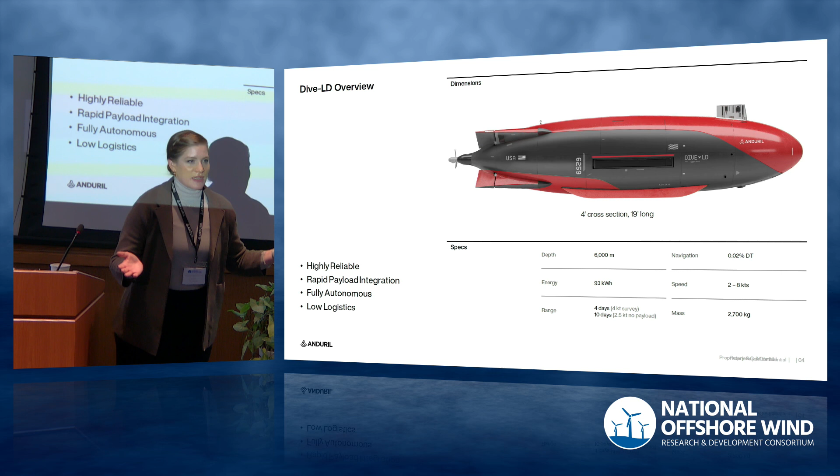The Dive LD is, for lack of a better word, a submarine robot. Rated to about 6,000 meters. She is fully autonomous and untethered. So it's a reliable operation. We can rapidly integrate different payloads.

So that means that we can take either commercially available off-the-shelf sensors, integrate it into not only the hardware itself, but our software control systems. And we can also do that with bespoke design and partnership with other clients, such as the Department of Defense and others. So it is quite malleable. There's a lot of different mission sets that she can address.

But for the purposes of today's conversation, we are going to be focusing on the commercial applications, i.e. subsea surveying, so cable inspections, foundation inspections, and just generally assessment for obstacles on the seafloor that could interfere with offshore wind construction. So that's the small market we are targeting right now, but I think it's designed to be a bit of a Swiss Army knife, and you can see why.

So we've stuffed a lot of sensors into this thing. We have a sub-bottom profiler, we have a side scan sonar, we have a magnetometer, we even have a camera. Well, it turns out it's really difficult to take high quality pictures in the Rhode Island Sound. It's rather murky, but we're excited to see how this can apply in deeper, clearer, less turbid waters.

So the cool thing about this is, as I said before, it's kind of a Swiss Army knife. And what we're working on is figuring out what combination of sensors is the most effective in terms of energy usage, right? So this is battery powered. We have 6 batteries on board. The more sensors you operate at a given time, the faster that battery is depleted, and the shorter your mission is actually going to be.

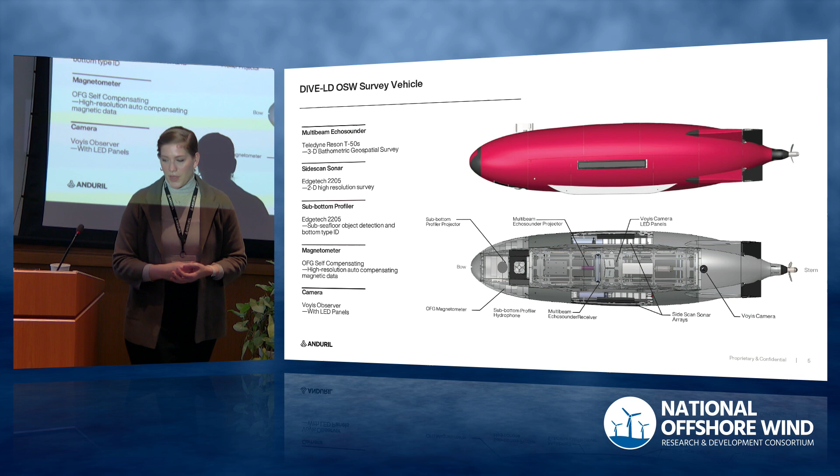So the more frequently it'll have to come back to shore, either swap out with another LD or charge and then go back out again. So it's that fine balance to figure out what the mission is, what sensors are most pragmatic in executing that mission, and what's the most time-effective course so that we minimize the number of times we have to bring her back for recharging purposes. So this is it in a nutshell. And here's more generally what they do, right? So we have a multi-beam echosounder. I didn't mention that before.

It is in fact on there. Eric's glaring at me—it's a very important piece of equipment.

But what this essentially does, and I won't get into each one individually, it's a different layer of understanding the—I'm sorry guys, I'll stay closer to the microphone.

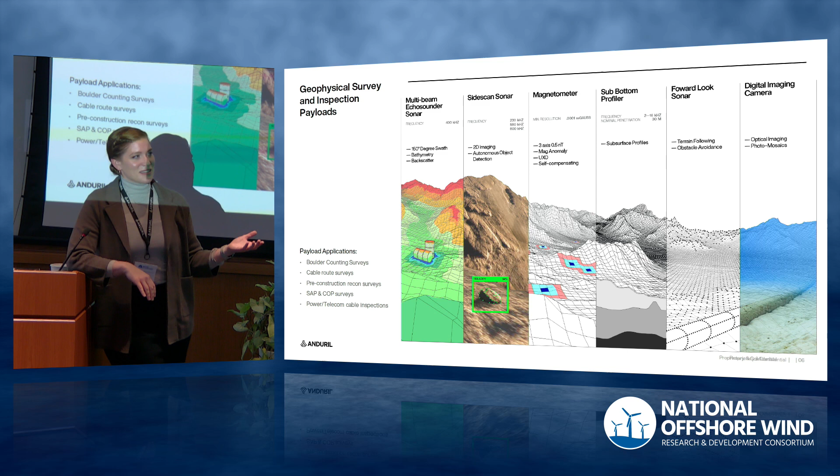It's the different layers of understanding the world below the ocean surface—not only the topography, but what's underneath the surface, what composite material is present. So how do we find big boulders that might get in the way of a subsea cable, or artifacts that need to be cleared for archaeological purposes? These are all very real problems. Our thought process was, let's incorporate the tools as we can. We are not designing any of these sensors, we are integrating what is readily available, and I think many other platforms actively use today. But how do we consolidate them and make it usable with our software?

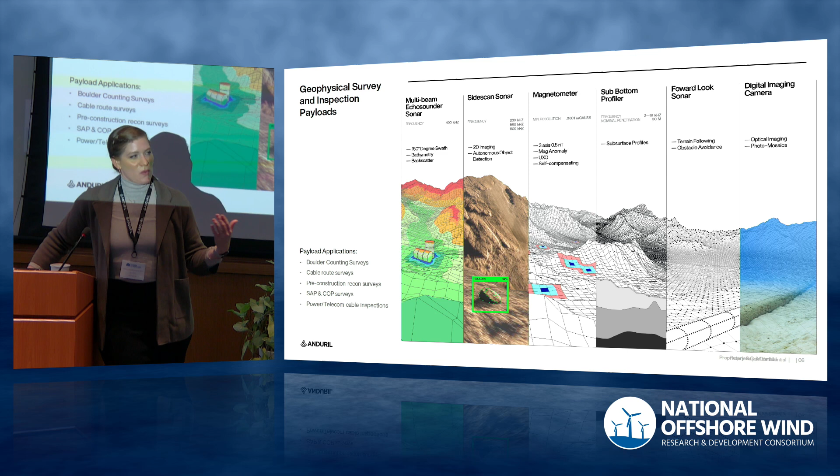So, moving on—there's lots of things on the Dive LD. I'm excited to show you guys in person tonight what it actually looks like. But what problem are we actually trying to address?

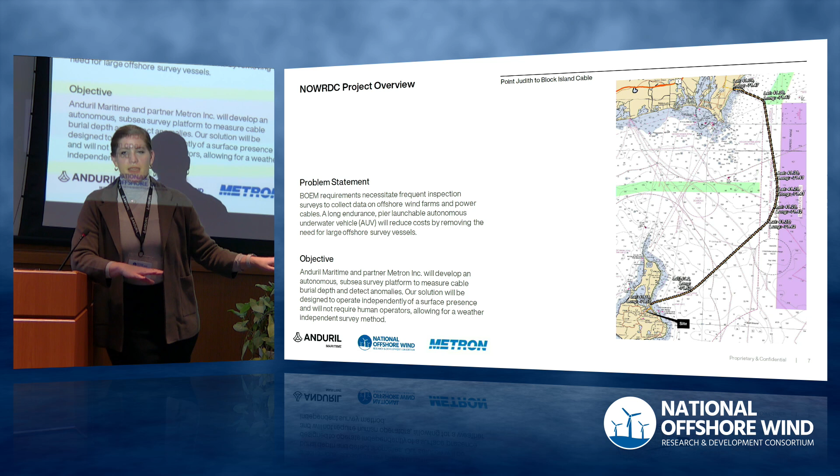I'm just curious, I wasn't here for the previous presentations—show of hands, who has actually been out to sea, like the ocean, and had to sleep overnight on a vessel? Okay, that is awesome, so a large number of people. So I don't need to reiterate to you how truly awful that can be, right?

So it is high risk, especially if you are conducting work that is sensitive to sea state and wind speeds. It is also high risk for the environment—not only the people doing this work, but the environment around you, as the previous panel addressed in depth. And it's also really expensive.

It's really, really expensive. So in light of the fact that there are so many of these subsea surveys that need to happen for this offshore wind work to get constructed safely and responsibly, we wanted to explore how we could use this robot to autonomously leave the pier, conduct a survey, identify anomalies, re-inspect them just to make perfectly sure they're actually the anomalies we want them to be, and then return home and report back on its findings. So how do we essentially take the operator entirely out of the loop? That's what we're trying to prove in partnership with NOWRDC and our partner Metron.

So what we're focusing on is the subsea cable for Block Island. We've been spending an inordinate amount of time bobbing around the Block Island Sound. And what we're doing is developing our autonomous navigation command and control to be able to not only conduct the survey itself—go from point A to point B—but also flag errors and flaws in the data it receives, so it has to be trained.

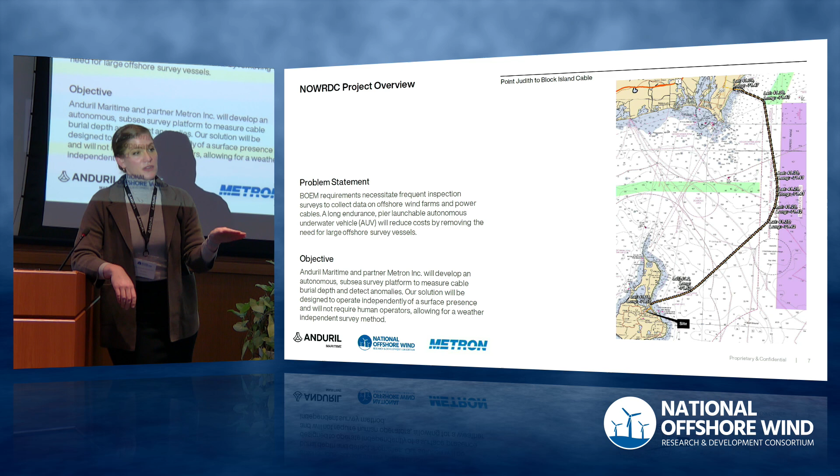We have to build up a library of what is normal and what is abnormal with confidence, and then as a result of that, further instruct itself to revisit those sites. So that's what we're doing. And here it is in picture form.

So our general concept of operations for this project is to launch from Quonset, Rhode Island, transit out to the top of the subsea cable, conduct a side scan survey, which is a corridor search—so you basically follow the track of the cable, you don't have to move over it in a lawnmower pattern. And then as it's conducting that survey...

And then once that first corridor survey is done, accumulate all of those question marks that it has, create a new path to re-inspect those things, and then come back.

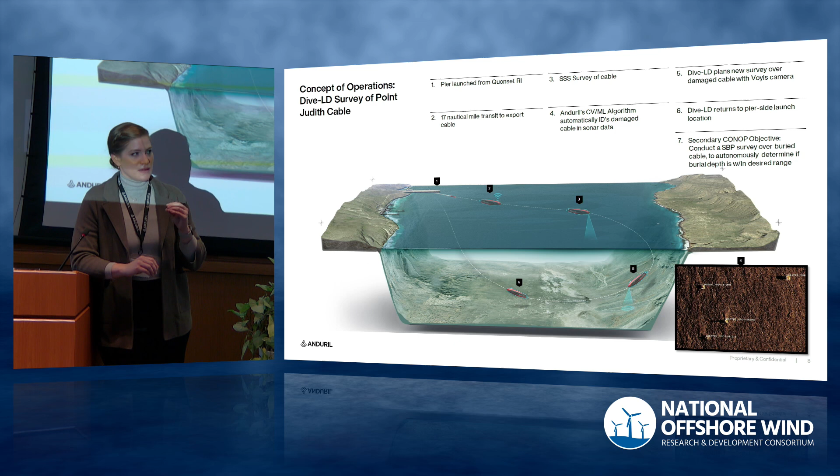So it's a lot—this is very, very, very software intensive. I don't want to hand wave over that because a ton of work has gone into not only developing the algorithm itself and how the machine is controlled, but also the quality of the data we receive and just making sure that our system is set up the right way—so refining how our sensors work. I do want to call that out because it is hard to put in under 10 slides the amount of work that went into this. But please understand that this is a simplification of a lot of work that has been done.

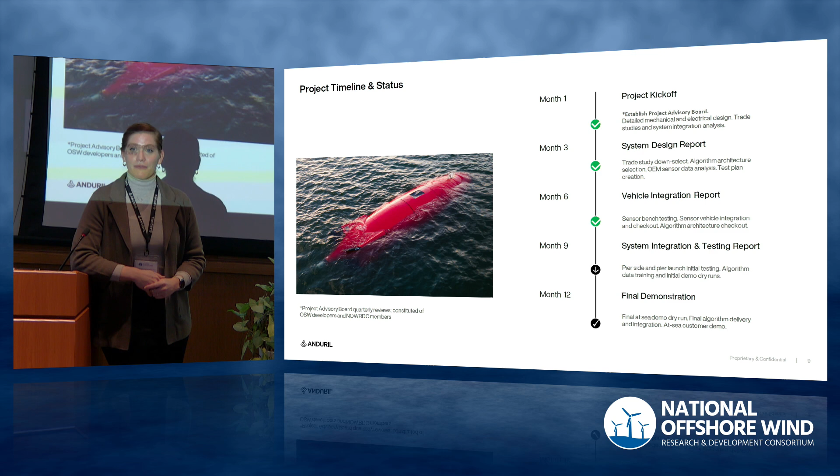The good news is we've been able to prove and verify that. The next step in January is actually launching the DiveLD robot from the pier in Rhode Island and letting her go off and do her own thing without any operator intervention. We'll still be following her from afar. This is one of the first times we'll be doing that with geophysical surveys. So this is a big step for us as a business, and we're looking forward to seeing how that moves along.

The last thing I wanted to highlight is some of what you actually see at the conclusion of these surveys. I showed you that picture with the lobster pots and a certain percentage confidence that, yes, that is a box that has lobsters in it, from the robot.

But this is what happens when you run multiple surveys using different sensors in a similar location - you can build a more detailed picture. This is a side scan output overlaid with a magnetometer output of a cable crossing off of Point Judith in Rhode Island, in the water. You can see just how compelling and detailed the final image is if you partner two different sensors together. So this is, in parallel, not only the autonomy side actually doing the surveys, but also the data output.

How usable is it? Is it something we need to chew on for 3 extra months just to get something our clients can actually understand? Or can we process it intelligently, overlay it with other information we've collected at the same time, to make it that much faster for people to understand any flaws or concerning elements of the seabed?

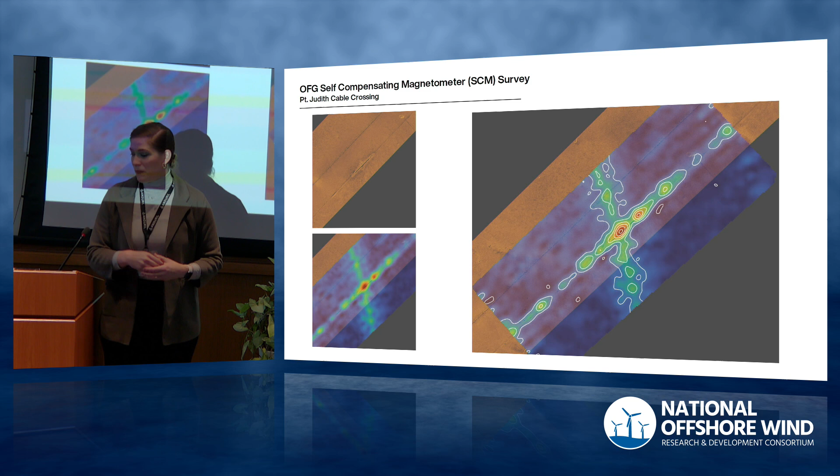So I thought it was a really compelling image. That's all I have right now. So mahalo for your time, and I'll be taking your questions shortly.

Thanks. And then I think Brian, you're up next. Maybe? Oh no, we do. Sorry, false alarm, Brian.

Good afternoon everyone, my name is Guiju Song. Mary just talked about the autonomous robot for underwater asset inspection. On behalf of our outstanding team from GE Research, I will talk about autonomous vessel-based inspection for assets above the water.

So in the next 10-15 minutes, I will firstly talk about some facts and vision for offshore wind O&M. After that, I will talk about our project overview, some technology highlights, and our results. Lastly, I will share some of the future work.

From different social media or your own sources, you may hear these days that some pipeline projects have been canceled. People are seeking renegotiation for offshore wind projects, and the cost for material and supply chain - everything seems to be shaking the confidence in offshore wind. But the United States government has reiterated the importance of offshore wind. So as researchers, we are thinking about what we can do, how we can help from the O&M perspective to reduce the O&M cost and help regain the confidence and optimism of offshore wind.

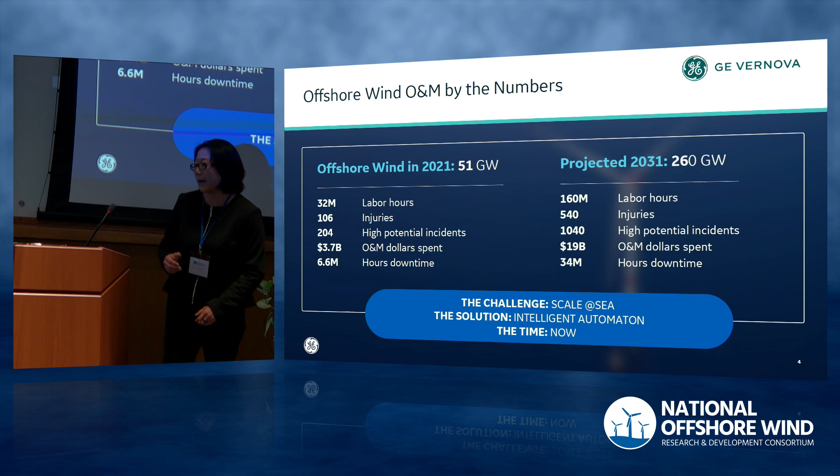There are 3 initiatives we want to propose. Kate mentioned in her opening remarks the data perspective, the AI modeling perspective, and the robots or automation perspective. We use a different terminology.

So the first initiative is about Sentinel. Sentinel is a way to place optimal sensors, optimal inspection solutions to help us see the history, the present, and the future of your assets, their health condition, their abnormal condition, and predict what will happen in the future. So Sentinel is very important, the first step.

The second step is what we call the digital twin. It's about using AI, machine learning, advanced analytics to understand and make sense of the data, so we can understand the condition of your particular assets and predict what will happen in the future.

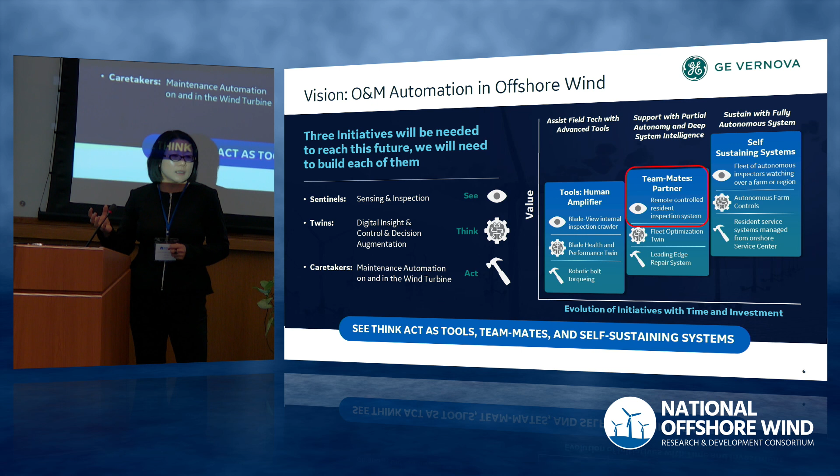The third piece is caretaker. It's about how we can utilize tools and automation to first amplify our humans' capability so our technicians can work more efficiently. Secondly, we can assist humans to take care of tasks we cannot do today. The third part is a bit longer term.

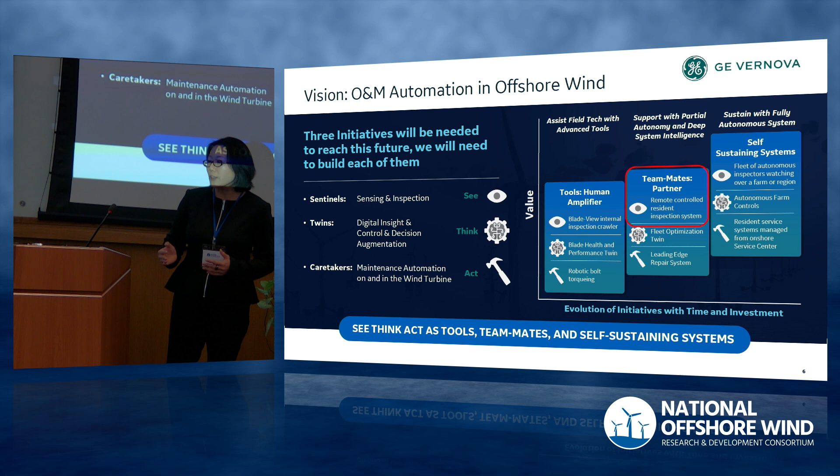It's really about automation. We will utilize automation solutions to replace humans performing dangerous tasks, so our people, our technicians, can do much more efficient, high-value work in a safe environment.

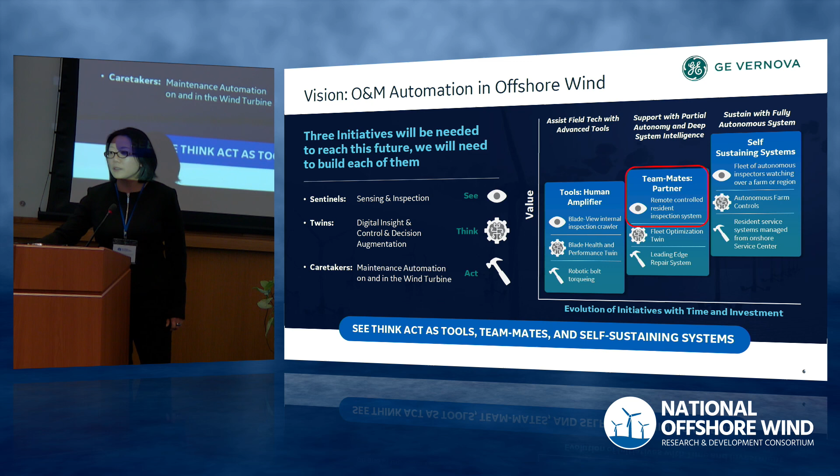So let me talk about our project funded by NOWRDC. This is a 12-month proof of concept project. The objective is to develop a long-term resident autonomous inspection robot. These robots can live in a wind farm permanently for a long duration mission.

Given the high payload, we can integrate all kinds of sensors and inspection modalities on this vessel, so we can perform visual inspection, capture 3D profile, just like you guys did, and also capture defects using thermal, IR, and other modalities. So this solution can live in the wind farm and perform periodic inspection.

Comparing to today's every 6 months or every 1 year inspection, this can provide us much denser inspection data. With much denser inspection data, we will be able to utilize AI power to help us do the prediction.

So you may ask me, hey, drone inspection is everywhere today, it's commercially available, why are we proposing this new solution? Here's my answer.

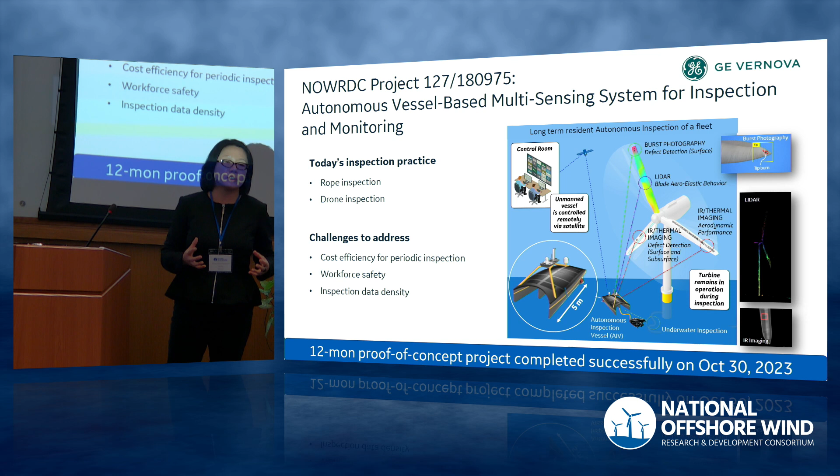Comparing to rope-based inspection, basically it's out of the picture, but some places still apply rope-based inspection. Comparing to rope inspection and drone inspection, as I mentioned, we can provide a cost-efficient way to give you more inspection data. That's one. Secondly, because of this high payload vessel, we can include multi-modality to provide different information which is not available, not possible today from drone inspection.

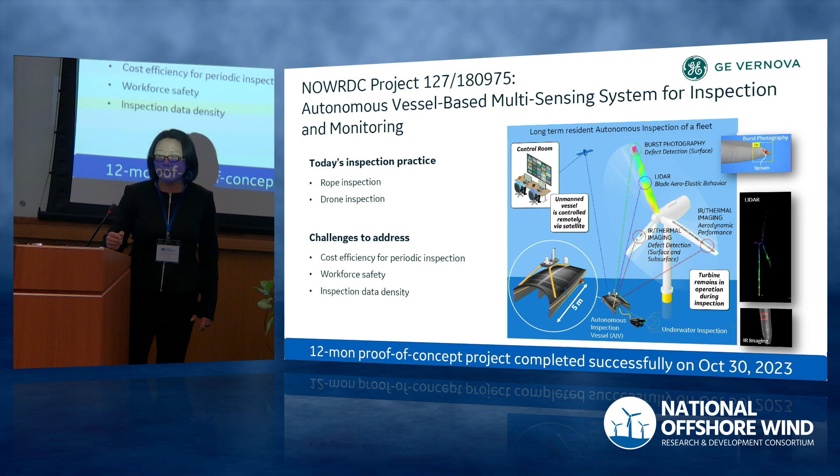So this project was completed on October 30th, after we did a field test at Block Island as well.

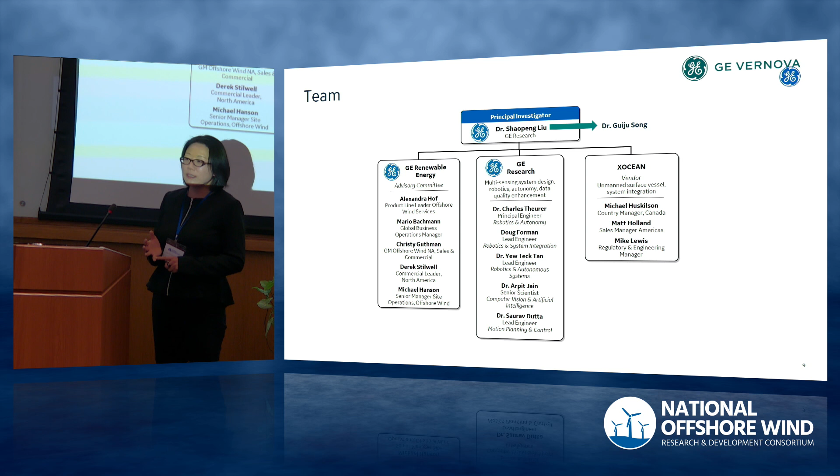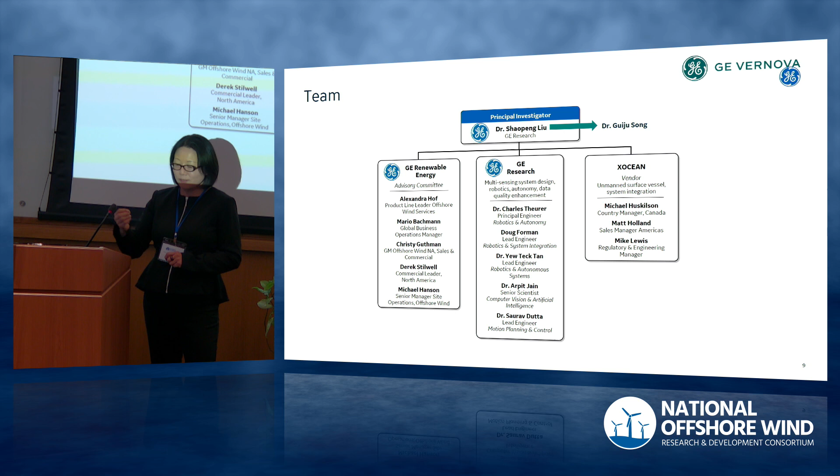Besides our outstanding team from GE Research, we also had an advisory committee from GE Offshore Wind, including the product line manager, our general manager from the sales perspective, and also someone from the O&M team, like Mike Hanson, who's in charge of daily operations for the Block Island wind farm and future wind farms in the US as well.

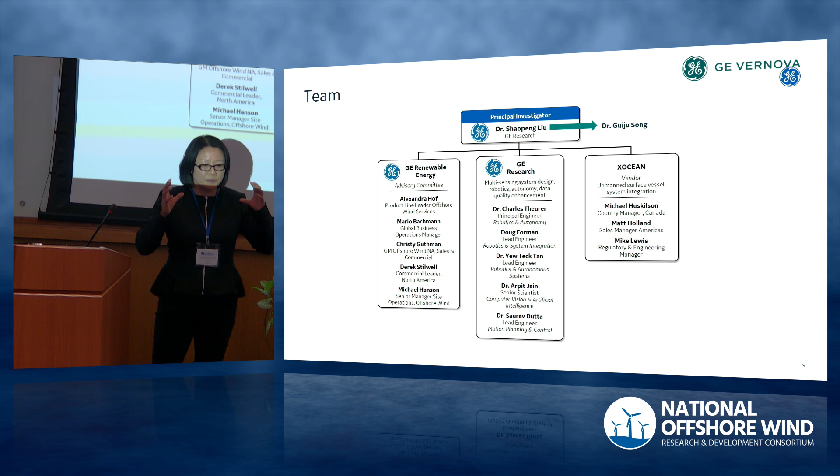Besides the GE team, we have XOCEAN as the vendor who provides the autonomous vessel for us. Just keep in mind this project is not about innovating or developing a vessel, it's really about developing new sensors. This new sensor suite can be plug and play with any vessel so we can perform inspection for offshore wind turbines.

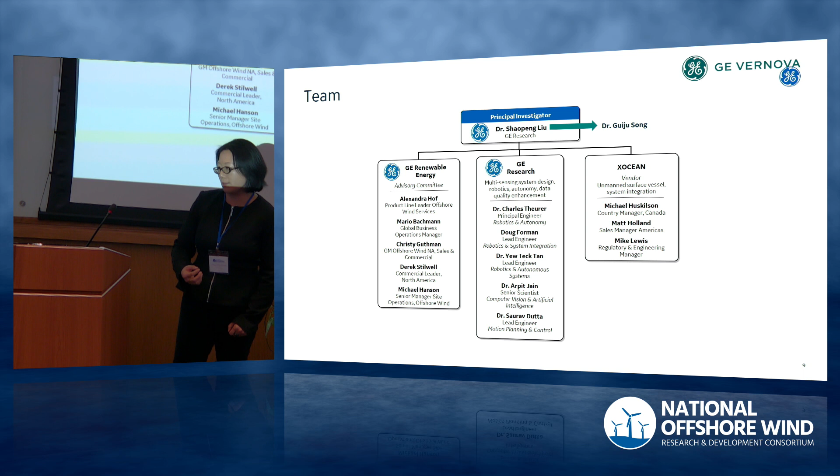So let me talk about our technology differentiation and our results. This conceptual design explains well what we are doing and why. Imagine you want to mount an inspection system on a vessel and do wind turbine inspection far away, because you need to avoid any impact to your turbine. Let's say we have a standoff distance anywhere between 75 meters to 150 meters from the wind turbine.

So how can you address the first challenge? You need sufficient image quality to be able to detect a 1 millimeter crack on your blade. That's the number one challenge we want to address.

Secondly, because the inspection system is on a boat, you know the ocean state always has multiple degrees of motion. So when you aim at your blades, maybe due to the motion, your blade will suddenly jump out of your picture. So how can we address this challenge?

And then another very important challenge is inspection while turbines are operating. I mentioned rope inspection and drone inspection—both of these methods need to stop the turbine.

So every 1 minute of the stop means you are losing your productivity. So that's the LCOE impact.

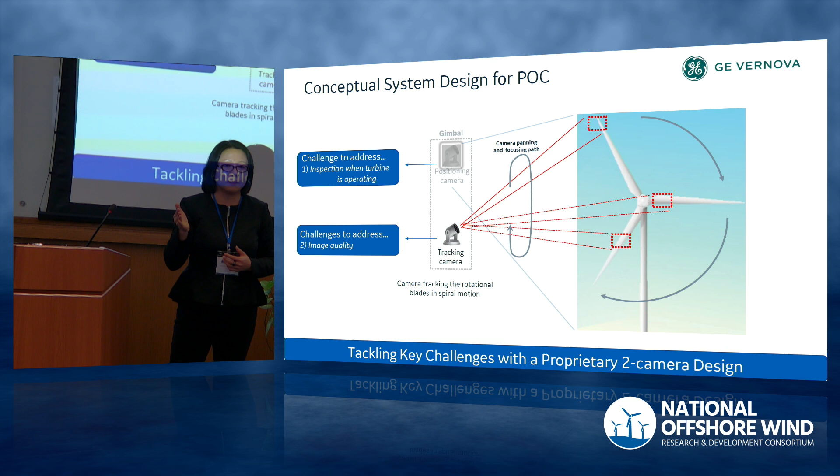The second camera, called the tracking camera, its function is inspecting. The specific design for this tracking camera allows us to capture high resolution images from far away and still be able to detect cracks or leading edge erosion at a 1 millimeter level.

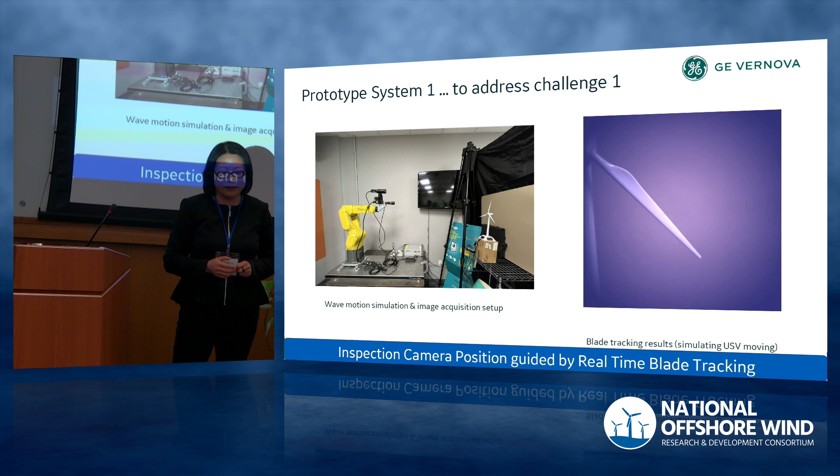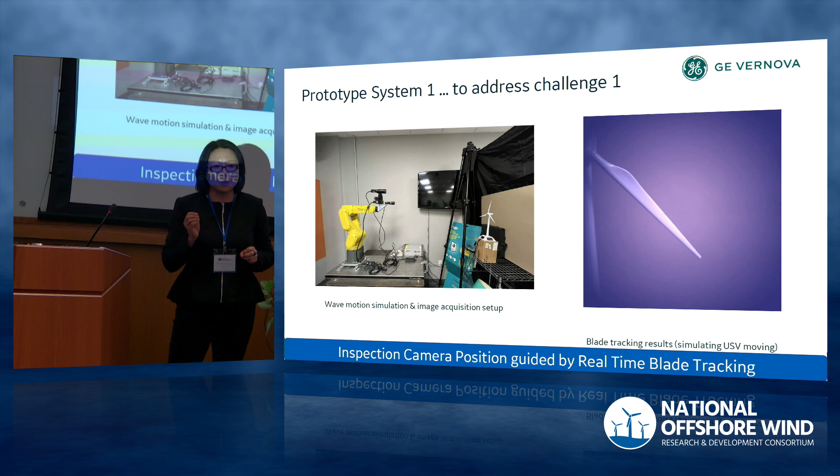So we don't bring the vessel with us in the Navy—what's it called—Navy Yard lab, new lab, yeah, sorry. But we have the imaging system with us tonight. If you go to the reception you will see our imaging system, and I have my own computer there, so I will play this video for you.

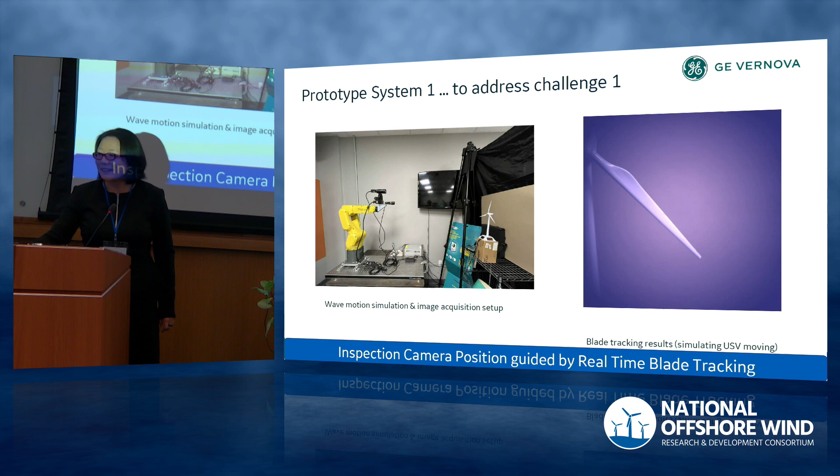This system, as I said, is plug and play. We had some fixture designs, making it easy to mount the prototype on top of this vessel provided by XOCEAN.

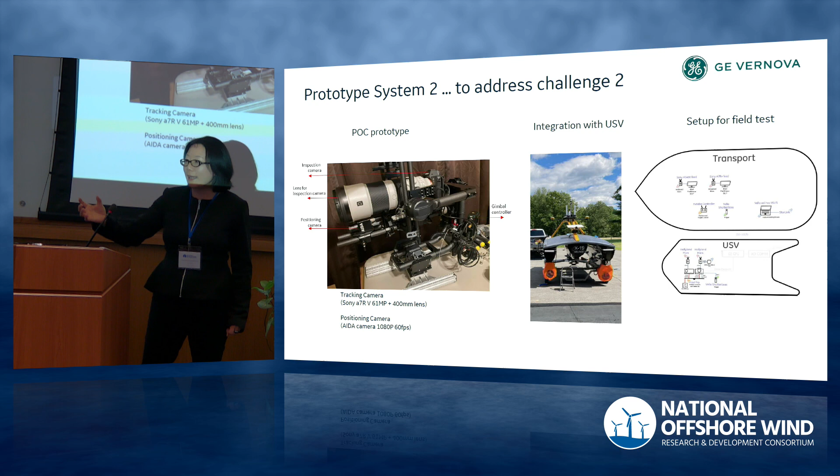And then with that we were ready to do the field test. Before we went to the ocean test, we also did a factory acceptance test at the Mystic River in Boston. The river environment gave us a water environment but with much more moderate, quiet states.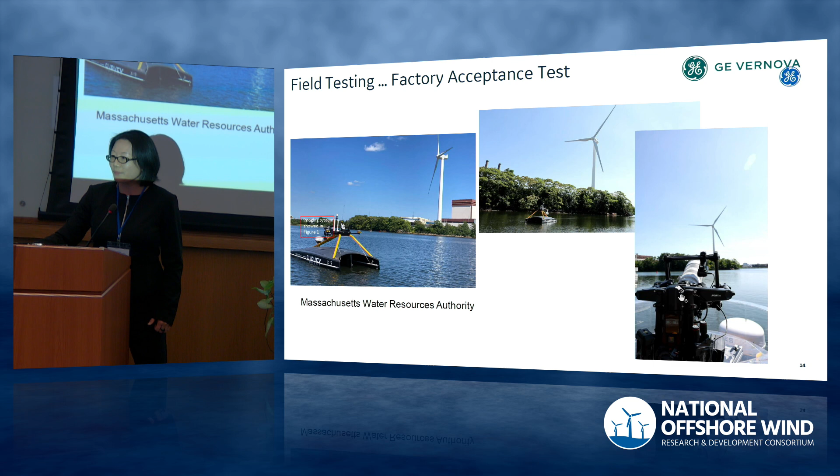Again, there are two videos showing how the vessel sails to the inspection site, and then how our system pans and tilts, moving around to capture the image. I can play the video in the evening. This is the field testing.

We launched the boat from Point Judith, same as before, and the vessel sailed to the wind farm. Over there we inspected 2 of the 5 wind turbines at Block Island. We got a bunch of pretty images—good image quality, with some defects visible from the blades and towers. Again, video will be played in the evening.

As I mentioned, this project was completed in October of this year. I'd say we proved the concept of the two-camera design, which provided reasonable image quality for defect detection, and the feasibility of using a separate positioning camera to help us inspect while turbines are spinning. This is very important from a value proposition perspective.

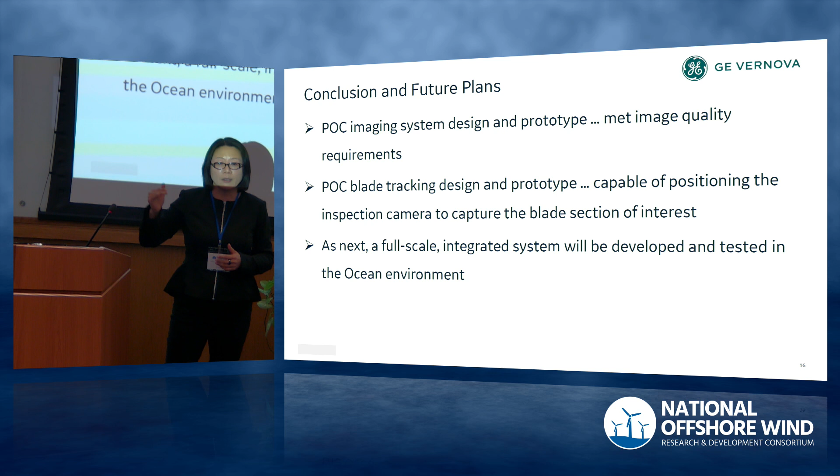As I showed you, the first prototype was developed and demonstrated at lab scale, with a very small, toy-scale turbine. So next, we will scale this blade-tracking lab prototype to full scale, potentially targeting the 12 megawatt GE Haliade-X wind turbine. That's a huge amount of scale-up effort we need to work on, then integrate again with the imaging system to perform a pilot test in a real environment.

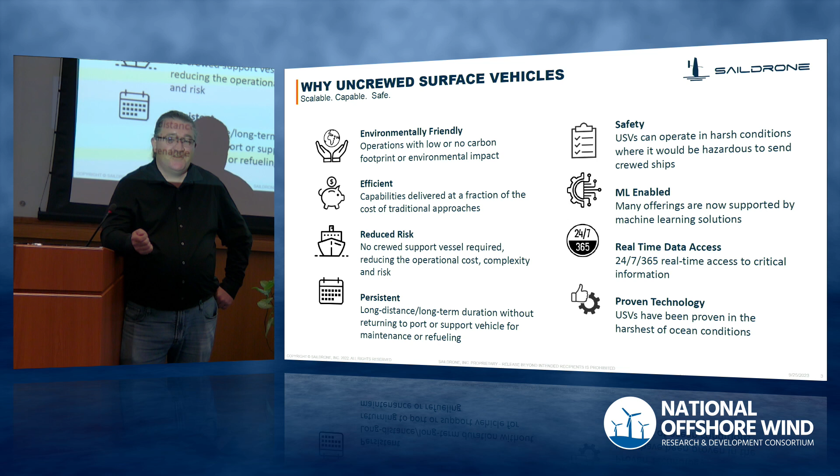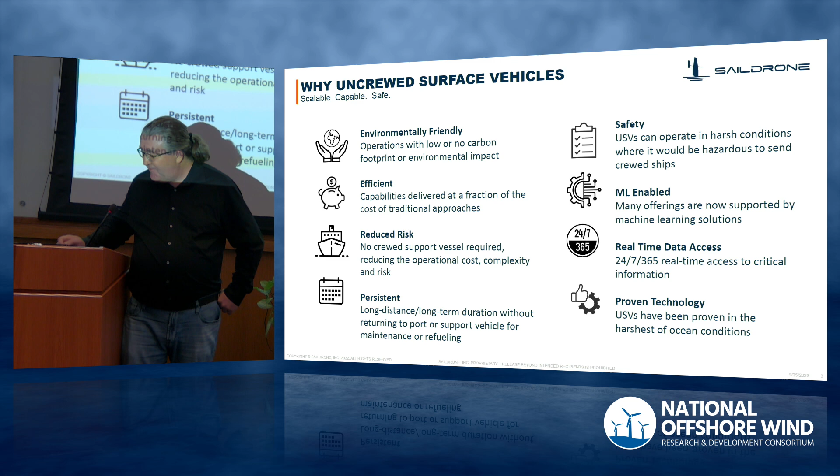At Saildrone, we focused heavily on the environmental impact of what we're doing. Actually, I have a really neat slide that shows this. Our Surveyor V1 performed a mission about a year ago where it did a 12,000 nautical mile round trip and did over 16,000 square kilometers of seabed mapping with its sonar system. That's primarily bathymetry work. It emitted just 2.7% of the CO2 of a traditional ship doing the same mission. So when you have something that is solar powered and wind driven, it is cost efficient and environmentally low impact.

When we talk about marine mammal mitigation and sonar passive acoustic sensing, being quiet is actually a great additive value to the solution versus something out there with big churning motors.

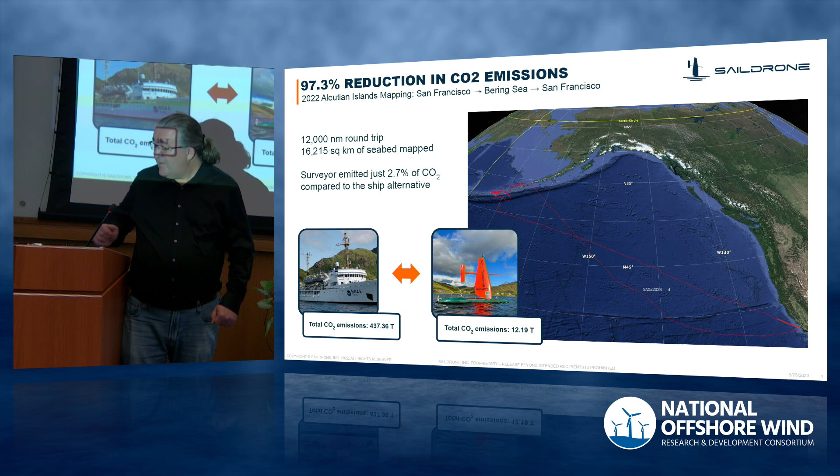As I said, we've been around for 10 years, and a lot of this was learning how to operate in marine environments. You'll see a lot of solutions out there, people with electrically driven drone craft in the sky or similar, where durations and ranges are measured in hours, days, not even weeks, not even hundreds of nautical miles, but relatively limited range.

It took a lot of learning to figure out how to trust and send autonomous vehicles out for months at a time and thousands of nautical miles, and have them be robust in a very difficult, acidic, thermal, high shock environment.

The newer classes of drones, the mid and larger ones, now are equipped with Starlink. We can get an enormous amount of data, and we can keep up with most of the bathymetry surveys in real time with capability like that.

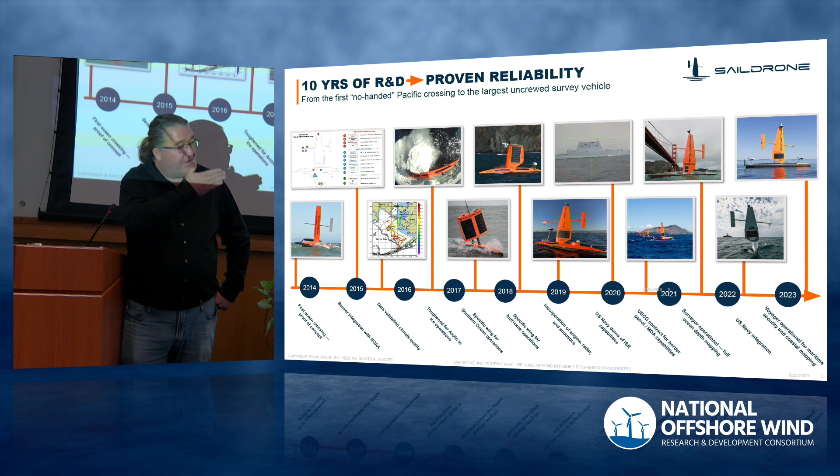The power systems took a lot of evolution to get them where they are durable for those mission ranges, a lot of custom work in battery generation and power management, and figuring out how we effectively integrate a lot of these third-party capabilities, these sensors. Whether it's ocean science sensors, domain awareness sensors, cameras and radars and the like, or in the future things like LiDAR for wind farm management. But now we've got a platform that is reliable, and we can apply it to different use cases.

One of the projects we've been working on, the one with NOWRDC right now, is creation of this new acoustic sensor. The market doesn't really provide one of these today. There are super large arrays out there, and there are fixed buoys that people use for acoustic sensing. But what we wanted to do was apply the drone platform we have, its mobility and its endurance, to sensing things like marine mammals.

So we've been constructing this — it's about a 3-4 meter long sensor with a tetrahedral array and very carefully chosen sensors and frequencies designed for detecting a variety of marine mammal species and the vessels around them. The concept is we can take this drone platform that can be out there 24/7, and unlike a buoy, which can also be there 24/7, it can move around and cover a very large area.

The array itself is designed not just for omnidirectional sensing, but beamforming as well, which means you can figure out where the signal is coming from. And if you have multiple drones, they can actually collaborate and not just precisely figure out where that signal is coming from, but track it over time.

Things like aerial solutions, where you might catch a whale breach or a plume periodically, are going to give you, if you're lucky, a tiny sample set of where those animals are. Whereas if you're doing subsea sensing, things like acoustic sensing, you can much more precisely track those.

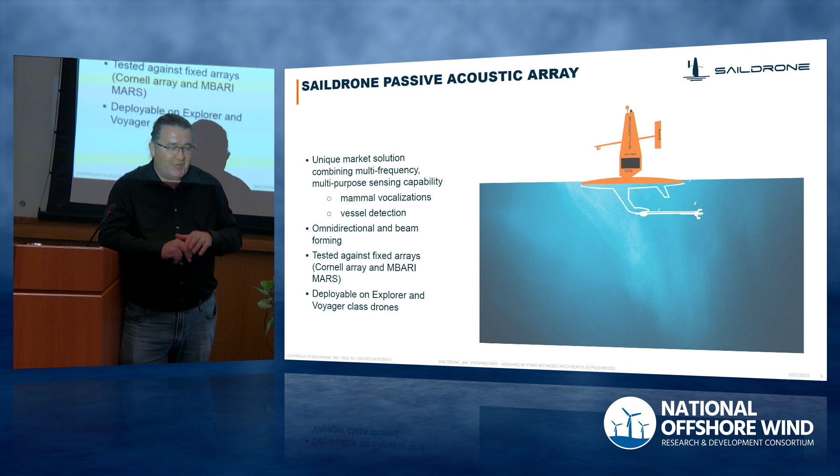This is our first test mission that we did with NOWRDC. I mentioned it was near Cape Cod. It was about 15 days. We were trying to collect initial marine mammal data in a very structured way where we could compare ourselves to the Cornell buoys, and then we work with a partner called RPS who does the technical data evaluation.

We collected over 700 hours of data. A lot to analyze, so they're still working on the analysis of it. It's back any day, any week now, in December.

Initially, we did a couple sample slices where we knew from the buoys that there were hits. We were able to see North Atlantic right whales—a really concerning population that we're trying to manage right now in the larger community. Humpback whales, even dolphins, we think maybe a blue whale, pending the analysis on that. But it was really exciting to see how clear the signal came out in this array we've been developing, how much we were able to differentiate from background noise and signal noise.

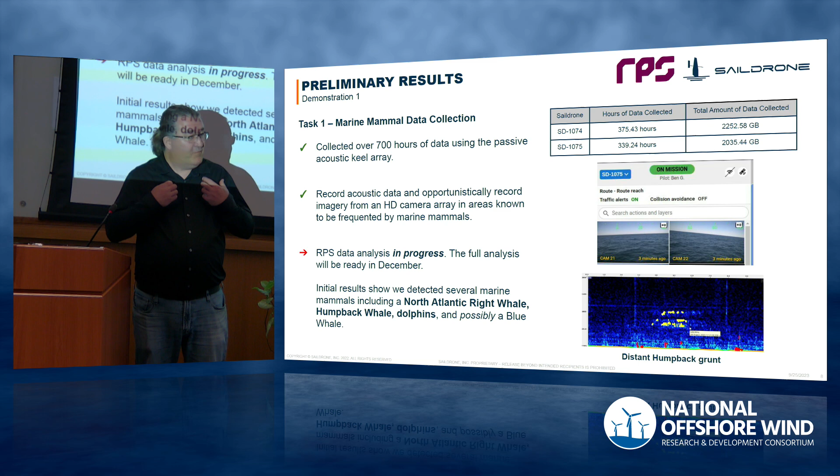In part that's helped by the fact that we have a very quiet drone. It's very quiet electromechanically—you get some amount of hull slapping and the like, but you don't have a motor to listen to. The vessel itself is very small, it's got a very small amount of draft. It is really quiet, which makes things a lot easier if you're trying to listen.

We're doing demonstration 2 right now, again with NOWRDC and RPS—another 2 Explorers, same slightly upgraded acoustic array, another 14 days, running off the coast of Carolina there, again comparing to some set points we have. There's a particular area that we want to measure that we believe the mammals are in at this time of year. We're racing a little against the winter.

Solar is starting to get a challenge. Fortunately, we're not at very high latitude or very low latitude—solar works great when you're at mid-latitudes. If you get up into the Arctic, it gets a little more challenging. That's why our larger classes of drones have the backup power supplies.

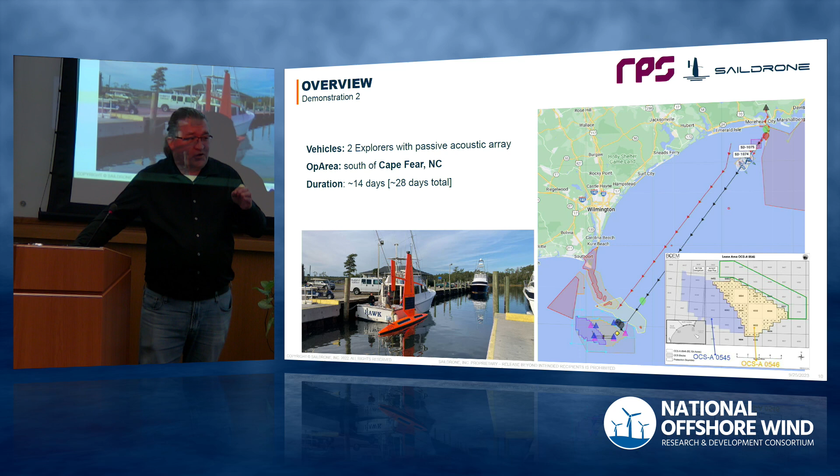One slightly exciting thing about our drones gets into some of the sessions today that have been talking about the need to make this a practical business. We worked with ABS to do the first uncrewed sea vehicle classification, so we got certified as an ABS certified vehicle. When you get into the business economics and needing to have regulatory surety, manage things like insurance, it might not sound as exciting as the passive acoustic sensing, but it's a fundamental thing to help make a business out of this.

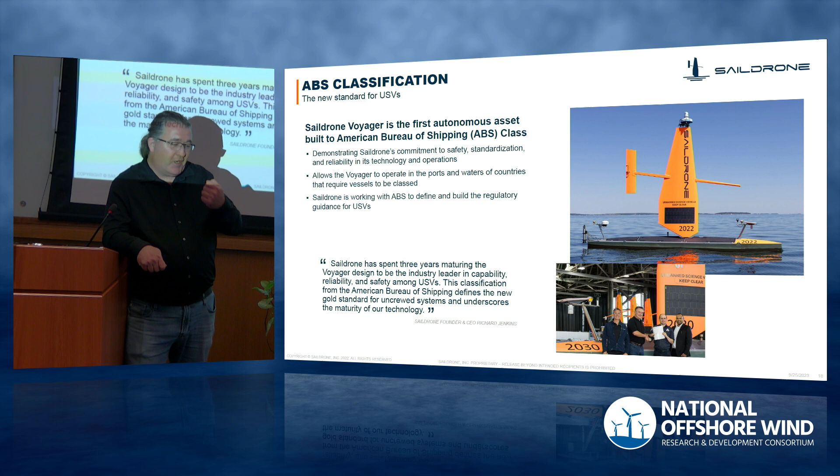We're a commercial provider. We're focused on helping our partners, our customers, utilize our platform technology to make their business efficient, to collect the data they need, to do it in a scalable way. So doing things like ABS certification is definitely part of that.

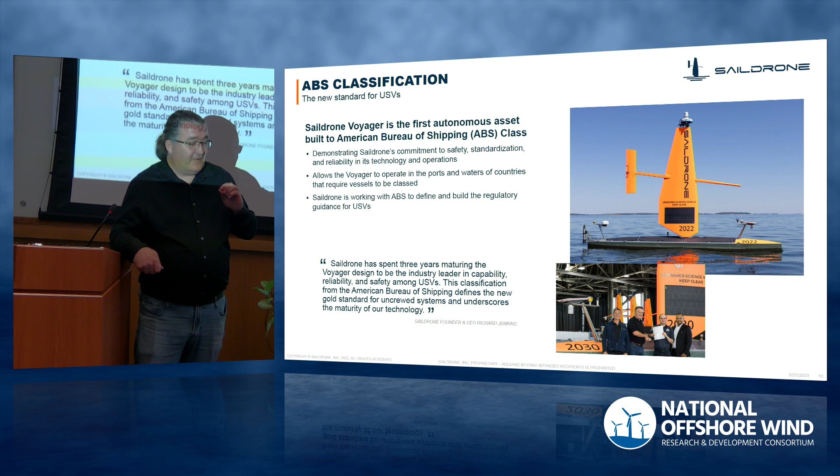That's the end of the prepared remarks. I'm excited to get to the panel and hear what you all want to know about. Thank you very much.